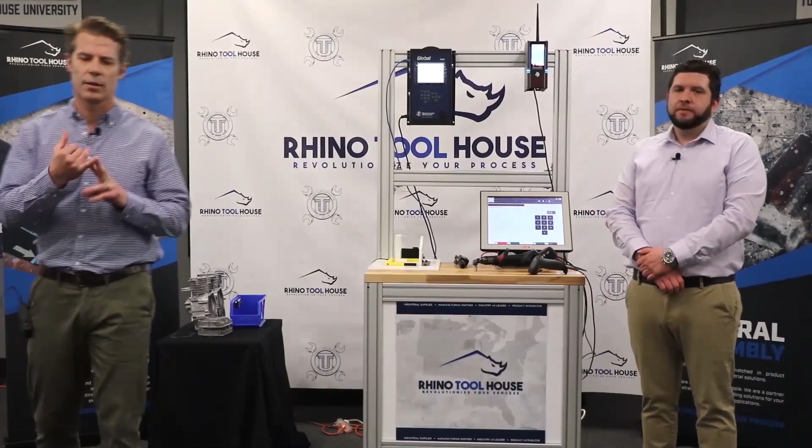We're doing the safer at home thing. All of us here at Rhino Tool House, we are an essential business, so we are open, but we're doing our distancing, and we're at home when we're not here, so a lot of our sales force is at home and interacting with you, our customers, so hopefully you're doing well and you're safe at home, and we'll get through this sooner than later. So one thing that I found that the safer at home's taught me is that I really miss bars, restaurants, and non-essential businesses. So I think we'd all agree that we want these things back open sooner than later.

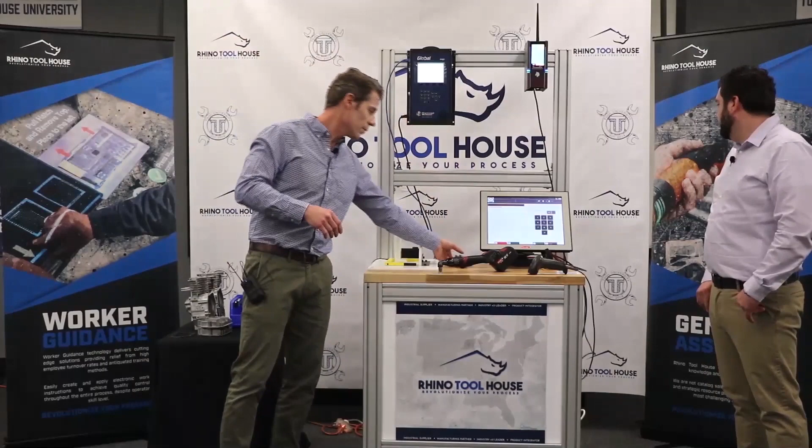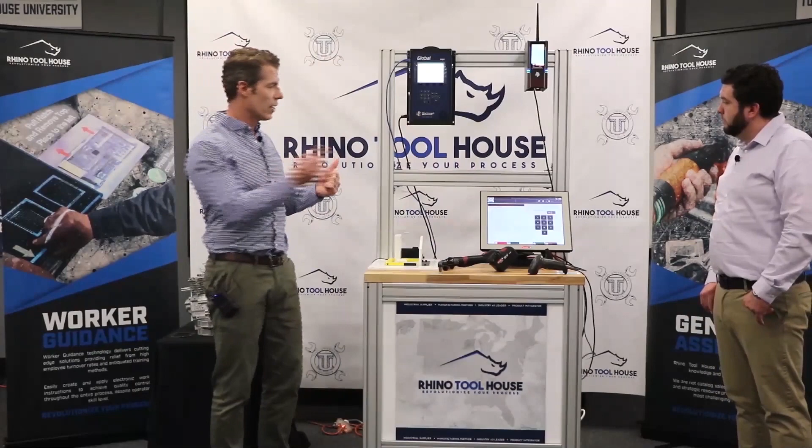This is what's going to drive the behavior of everything that's going on. And then we can also put in other devices. So we've got a Sturtevant Richmond Global 400, up to 16 different tools. We've got a click wrench here, FM click wrench that's going to send a signal back. But we could also do digital torque wrenches. We could do battery torque tools. And we could all make this one big happy family that would take the operator through it.

So I think I covered everything for the intro. I'm going to turn it over to Stefan, and he's going to talk more about this, and enjoy the show.

Hello. So like he had said, we're talking about Pivotware today. Pivot, PVT, it's for process, visualization, and traceability. And then ware for hardware and software. So when we talk about process control, we like to talk about the importance of process control. So you want to have a consistent product every single time out the door. You also want to be able to eliminate time for different types of training, and you want to be able to increase productivity. So with this, we have a no faults forward system, which allows any product being made to interlock into any type of device that you would like.

And from there, if a mistake is made, we're able to catch it immediately instead of waiting for it to go from station to station down the line, because the farther down the line it goes, the more cost it takes to actually repair said problem. So being able to catch something on the fly and rectify it right there is a great benefit.

So Infinity itself, or sorry, Pivotware, kind of think of that like Microsoft Office. So that's the whole product brand. And then it comes in 3 different options. So right here, we have an Infinity station, which you can get with the panel PC here, or just the software platform alone.

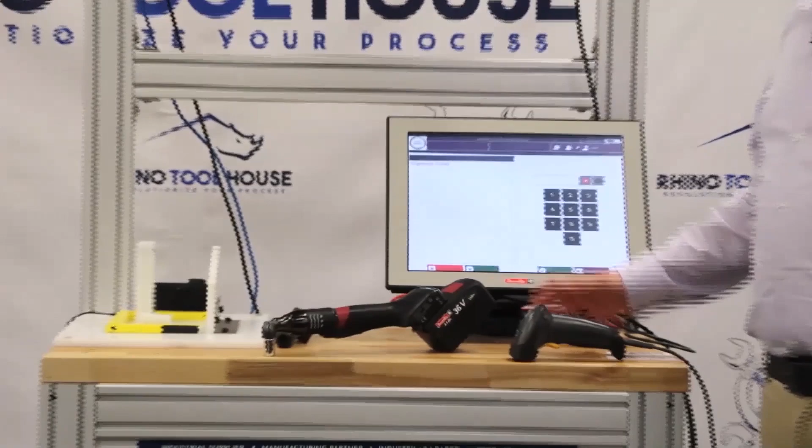There's the configuration software called Fusion, which is very easy to use to the point where you do not have to be a controls engineer to interlock all of your different types of devices here, whether it be your I/O devices, your pick lights, your tools, any sort of cameras, scanners, anything along those lines. And that's all done inside of Fusion.

And then we have our traceability services. So that allows us to create reports on the server end, as well as talk from station to station to make sure that it was properly done at one station before it goes to the next station, and run local and network-wide reports. So essentially, full birth certificates of the product.

Let's see here. As far as the traceability aspect goes with it, the beauty of it is being able to know who, what, when, where, and how. And so with being able to have all that information, if a product ever leaves and it comes back, you're able to scan that particular serial number, and you'll be able to trace down every individual bolt to who did it, when they did it, etc.

So I'll go over what we have here itself. So we have our station. I've got our 2 tools. I've got a part sensor here. I have a button to advance the process. I've got a pick bin right here, pick light. Make sure that we pick the proper bolts and some of our parts. So probably be easiest to just run through the demo right here.

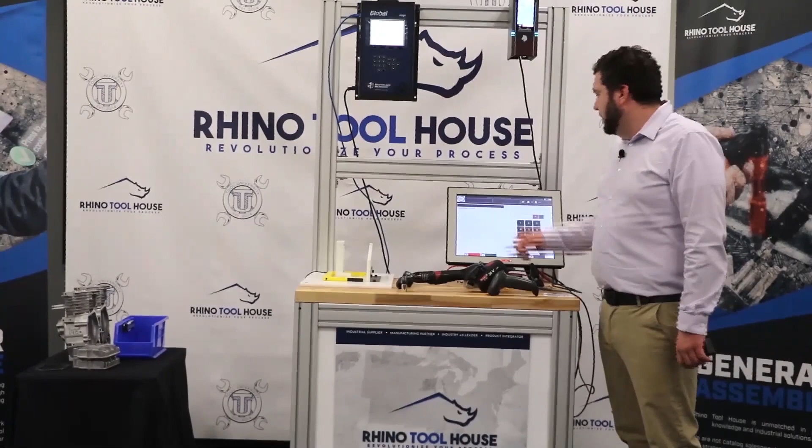The very first thing that the station tells me to do is to log in. So we want to know who we are. I have operator and supervisor on here. Usually you would put each individual person's name. You can mass import your entire list of operators and everything, so it's very quick and easy to do. So I log in as the operator, and I'm ready to begin my process.

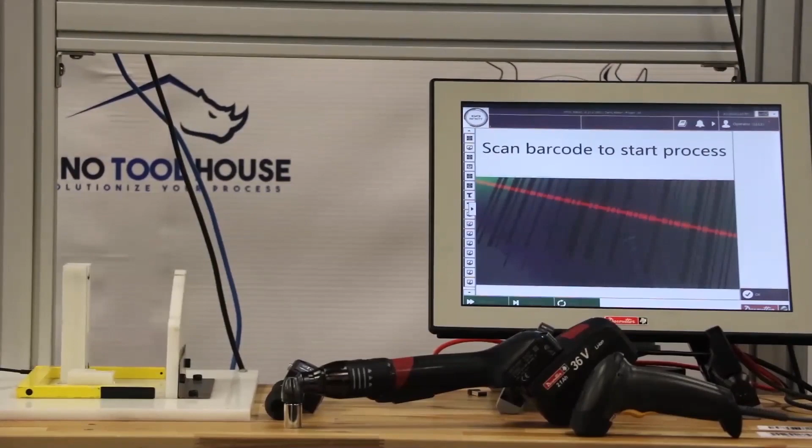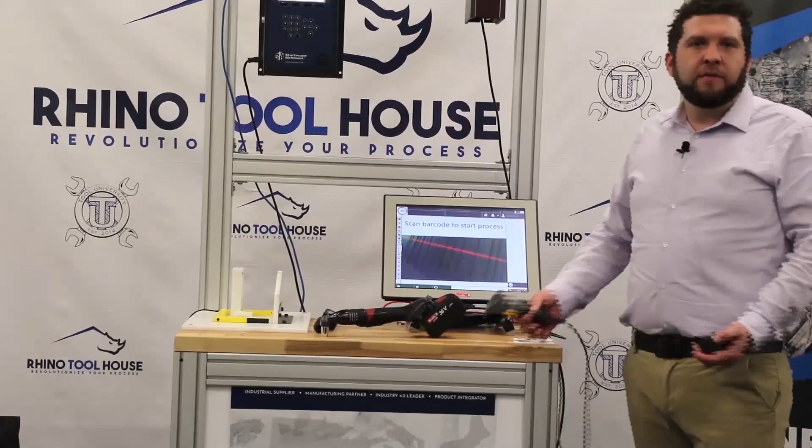So it says scan the barcode to start the process. So I'll pick this up. I would scan the part, any sort of traveler. This also could be sent down from a higher level system, and that way we know what it is. So it could come into station, and after the first station, you might not even need to scan it, depending on how your line is set up. But this particular one, I'm going to scan it.

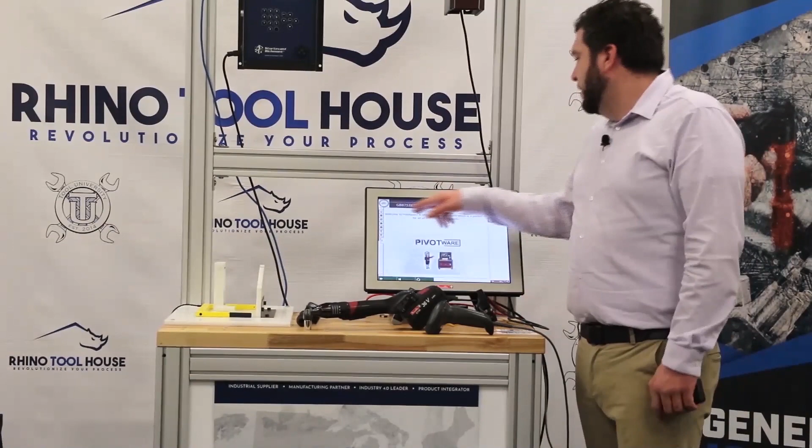And now what I just scanned up here, this is our model number. I'd place that up here. If I wanted to add in a unique serial number, that would go right here. I'm actually able to filter our builds based off of what I'm scanning here. So it just says, welcome to Pivotware, a process control platform.

So I'm gonna hit OK. So you can hit OK on the screen. But I also have a button to do that as well so that we don't have to walk back over to the screen every single time. So instead, eliminating those non-value added activities. So right here, it says place the part into the fixture.

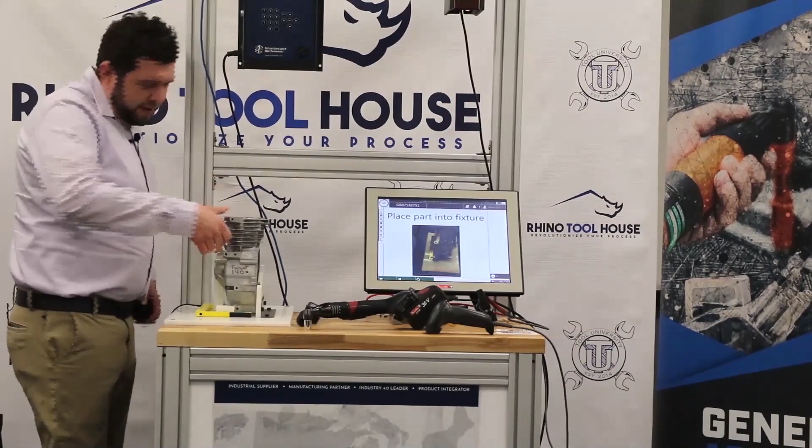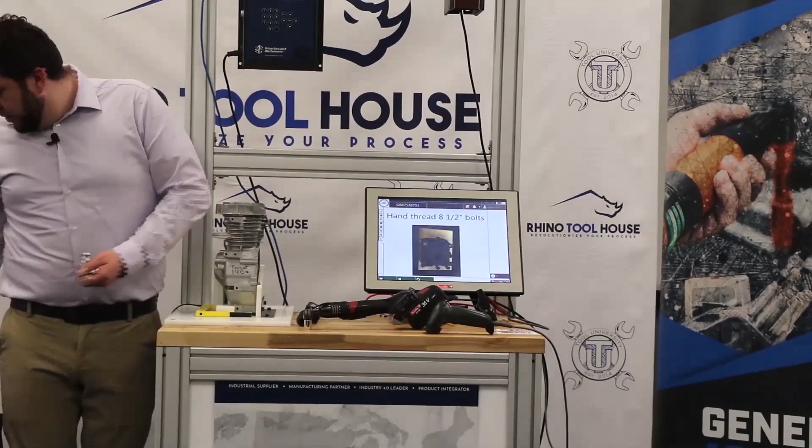So now, as we put the head on, it wants me to grab the bolts and tighten those. So this right here is where we could have it recognize that I went into the bin and actually picked the bolts themselves. It wants me to hand tighten those.

So as I'm doing this, sometimes we might have some sort of vision inspection system recognizing that the gasket was placed on correctly in the right orientation, that the head is properly aligned on there, that I'm putting the bolts in the proper sequence. You can also use, when we get to the torquing aspect, positioning systems for that as well. So we could use it for a standard position encoder-based torque arm, or we can do it with one of the multiple wireless opportunities for tracing the tool, tip of the tool here.

So I've done that. I'm going to advance, and at this point, prior to this, the tool was not active. I could not run this tool. It was completely shut down. But now it's going to tell me bolt for bolt where to go on here, and the tool is active now. So the hotspots on here are just a reference, unless we are tying in some sort of positioning system.

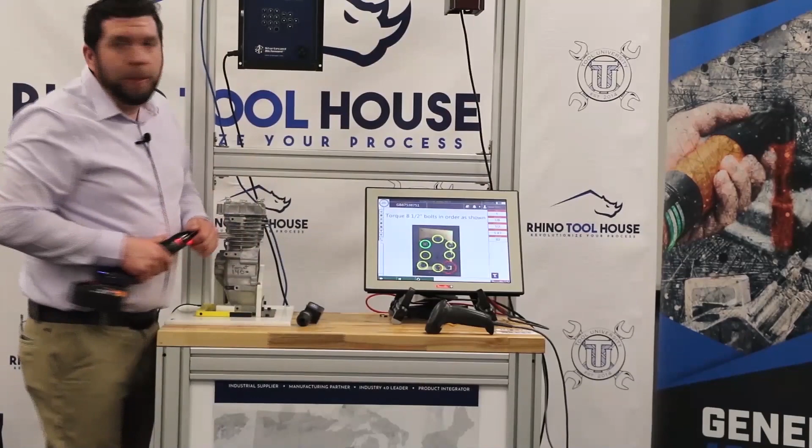So I timed out there. And when we get an error, so I'm going to try to force a bad here. There we go. So I have allowed myself 2 opportunities to get this bolt right. So I could back it out and try it again. But if I happen to get an error again, now it completely locks out. The tool is no longer functional.

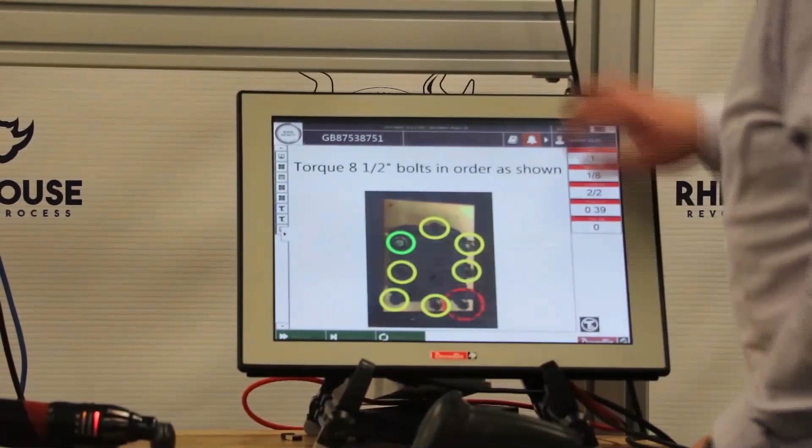So what I'd have to do here, because I'm just the operator, I would have to log in as a supervisor. And this is a feature on here. We could actually call a supervisor from a list of options on here that we could tie into I/O as well. You see the flashing bell that can go into a stack light or anything along those lines. However you want to do it, maybe a little buzzer tied into an add-on system somehow.

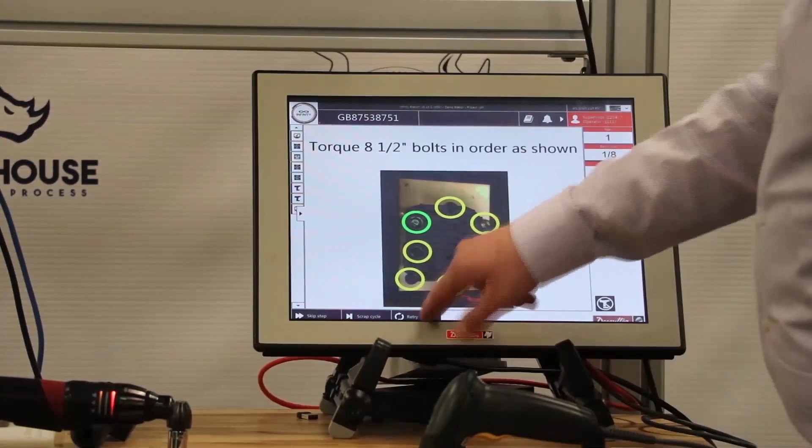So as a supervisor comes over, he logs in, and now you'll see both the operator and the supervisor are logged in. So we'll know that they're both logged in during this error as it occurred. You also notice that these options down here for skipping a step, scrapping the cycle, or retrying the bolt itself, now I actually have access to them. So I hit retry, it enabled the tool again, and I'm able to run this bolt on. All right, now I got my good.

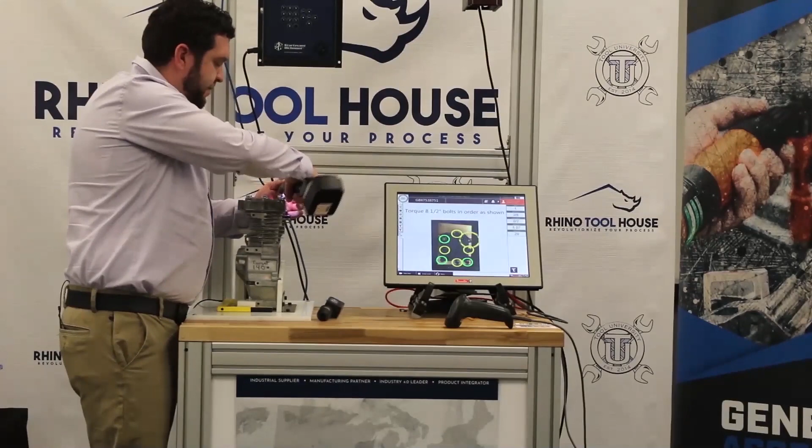I could watch him run a few more. And I could also log out at this point as well. As everything started to go well, you see that they're able to continue to move on here. Say, okay, it seems everything's going smoothly. So as a supervisor, you'd come and you would log off and let them continue on with their job without missing a step. I can continue on here, doing the cross bolt pattern here.

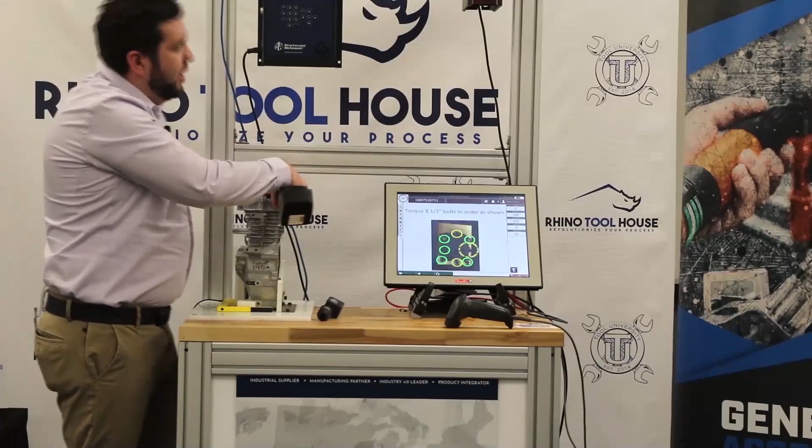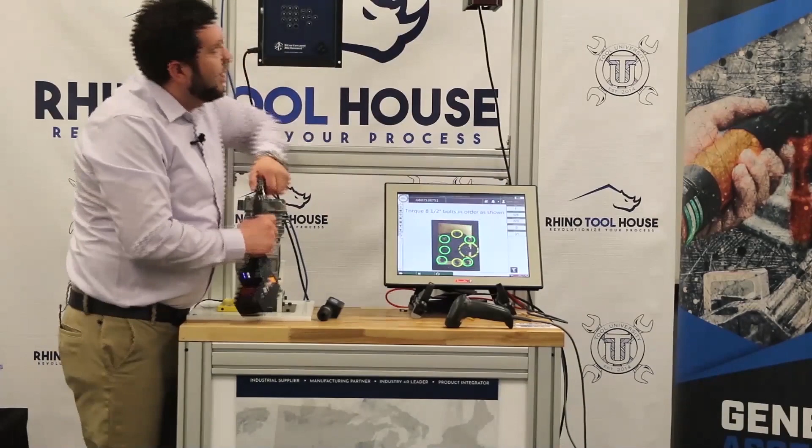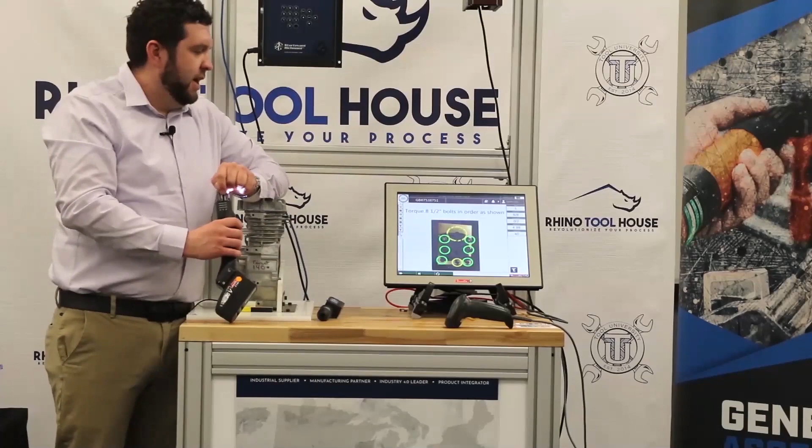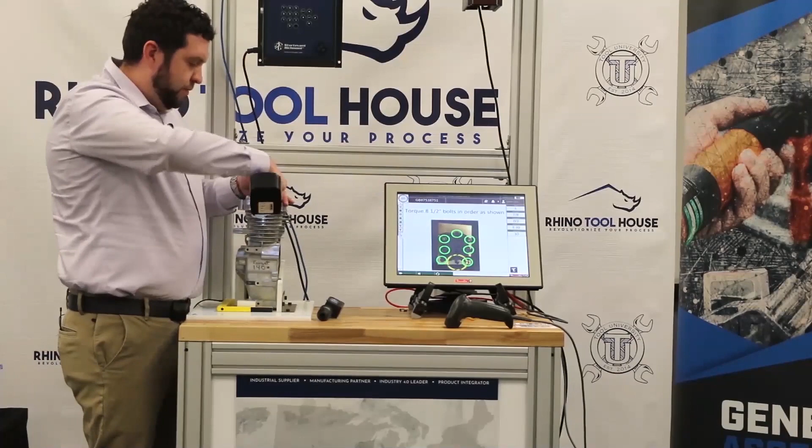Let's see here. And if you had any sort of issues with the bolts, with our andon call here, we could also do that as our option. Oh, got a bad and a good. Now every time we get any sort of torque result, it's going to be recorded. So all of the bads are going to be recorded, as well as all of the goods. So you'll notice in the report, I'll show you the report when this is done, and we'll be able to see that we had a failure here, a failure there, and we just continued on. So I completed all the bolts on there.

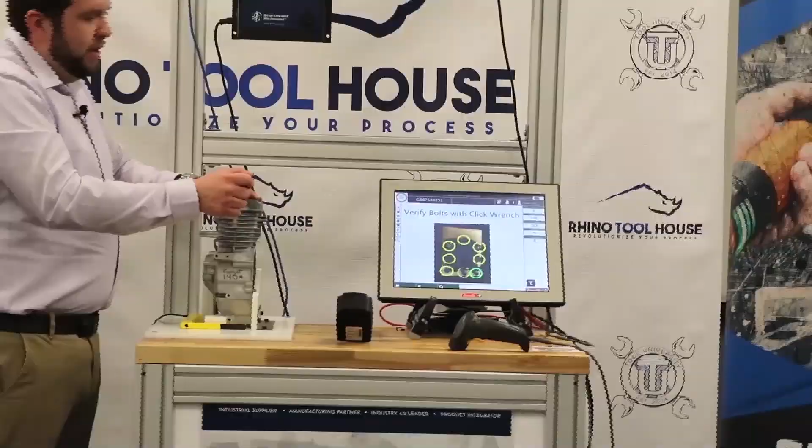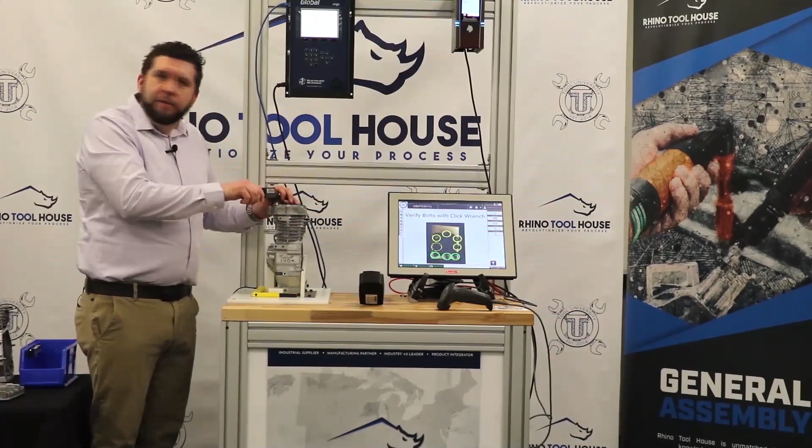Now it wants me to verify the bolts with the click wrench. Like Chip had said, this is an RF click wrench with the limit switch inside of it. So as we go through to torque each one of these bolts, we get a good and a bad. So you can also error proof with the click wrench. So if I were to over torque this, let's see, we got a bad there. So I allowed 3 retries with the click, but usually you'd probably want to back that out a little bit and try to click it again. So as we fly through, make sure everything's good.

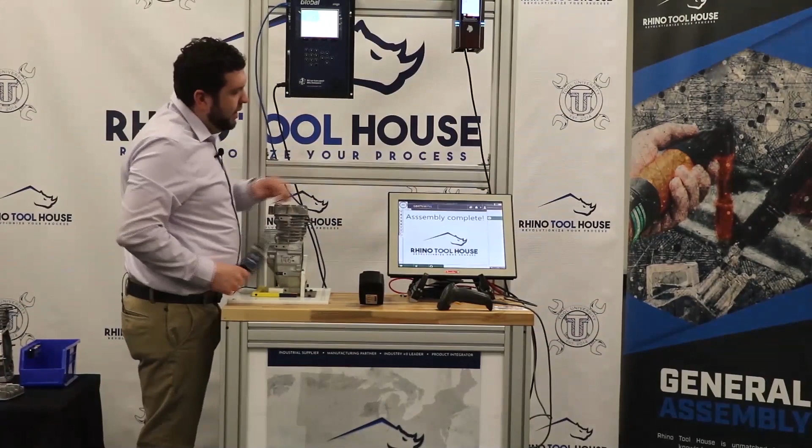There. Now the assembly is completed. The step is on a timer here, or we could actually just hit the button to advance it to start back over. At this point, you're able to scan a new product. A new one would come into station.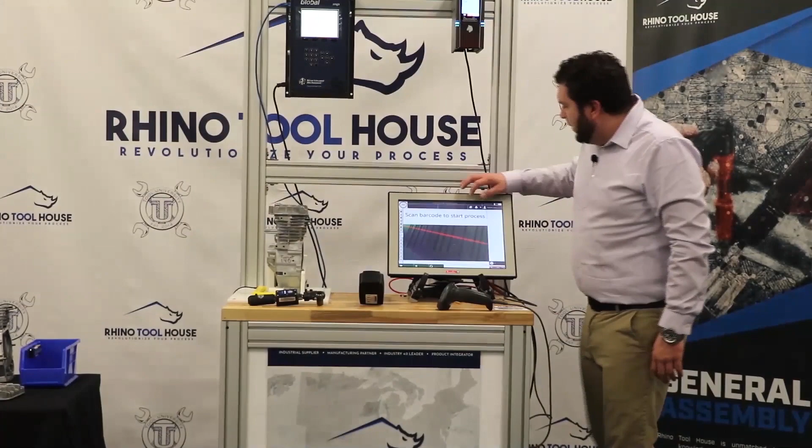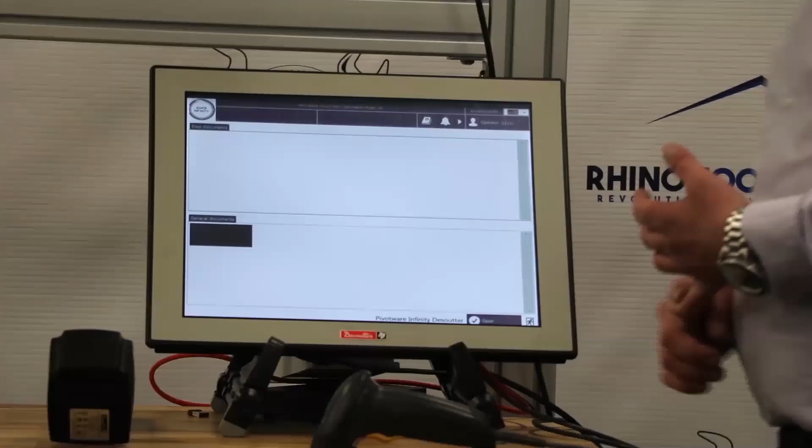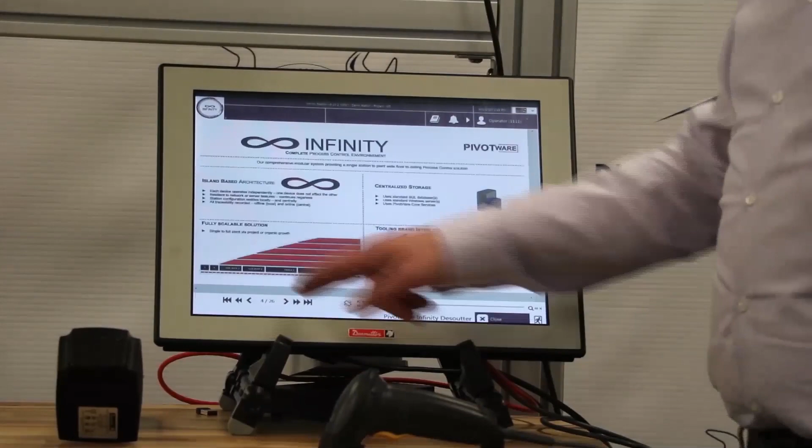Now, on the screen itself, we're able to add in additional PDF documents or step documents. So any sort of control document you might want, maybe emergency evacuation procedures, PPE kind of stuff, company information. I've seen that put in here, as well as just general information. So you can open it up, and it's a little viewer here. So you're just able to scroll through, put any sort of information you want in there. Able to add videos and GIFs.

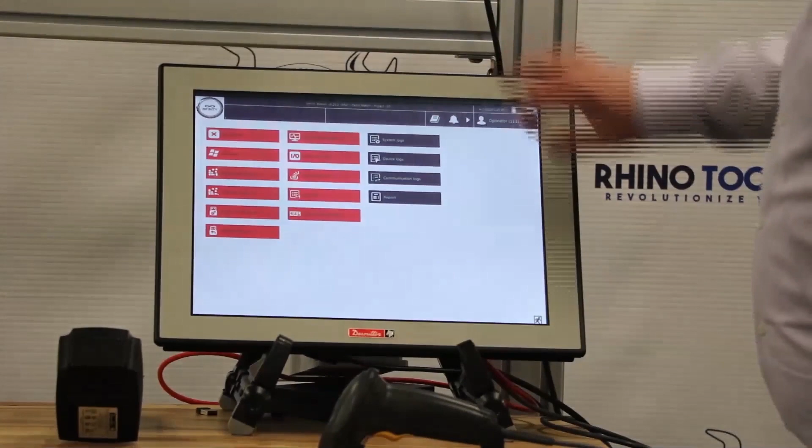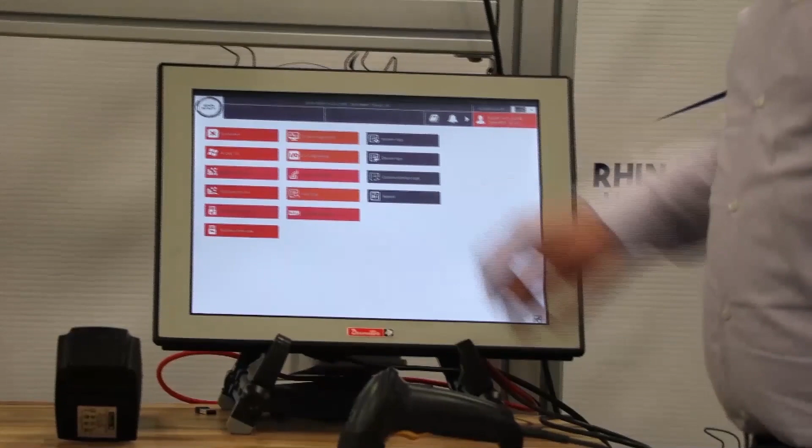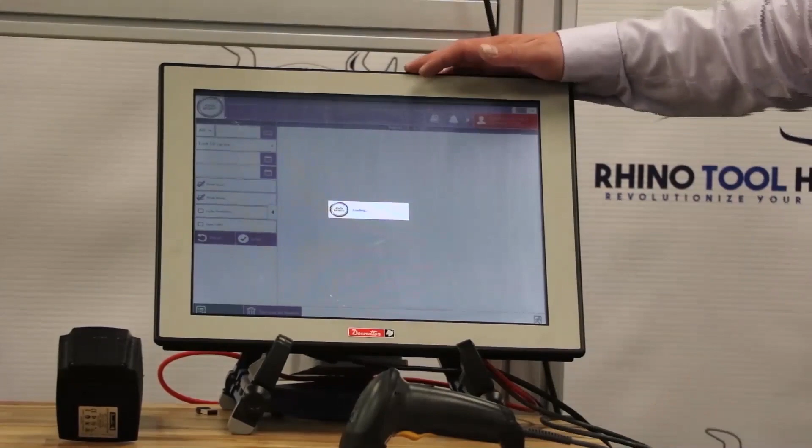Now I'll log back in as a supervisor, and we'll take a look at the report. So right here, we can hit a report. This is a very similar report that we would have if you were running it from your computer, if everything was networked. So this would just be one individual standalone station. However, you can just keep on building upon them. So you can do sub-assemblies, you can do the full assembly line, you can go line by line, it doesn't really matter, but you can start with just a single station here.

So here's the last 10 that I had on here. So if I were to open it up, you can see that it was passed, completed. You can see the start and end time and the duration of the step. You can actually expand it, and you're able to see all the information here. My actual torque values as well. So you see my failures. All the individual information's all right inside of here. Now you're able to export.

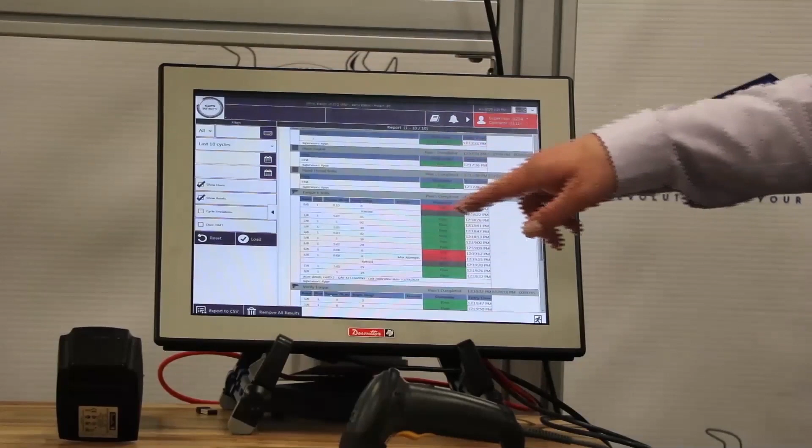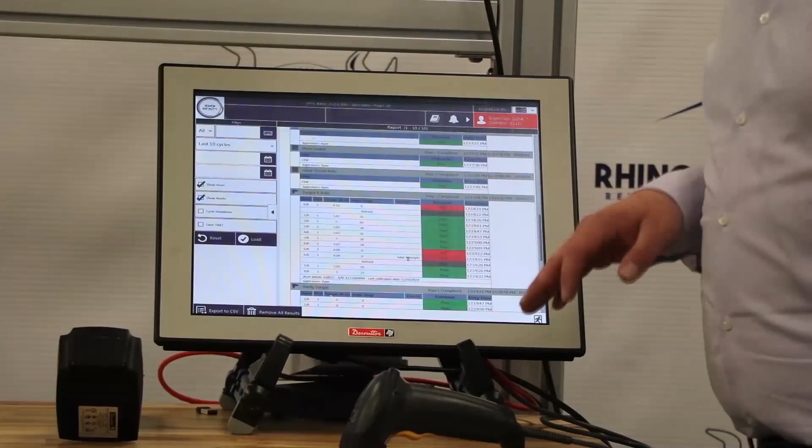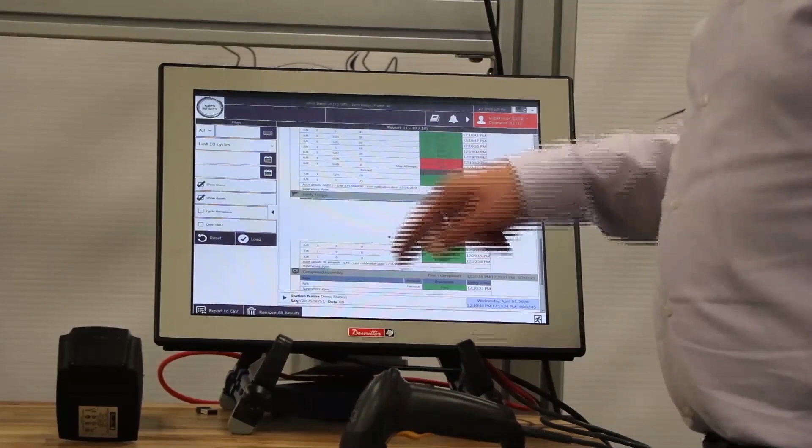So we'll have our torque and angle, whether or not it was retried, whether or not we had to hit the max attempts. So if I just got one, since I allowed for 2 bads before it moved on, then it would just be a retry. But since I had hit 2, it says max attempts, and that meant it had to be unlocked. So that's still somewhat flagged in the report to know that there was an error in the process. However, it was rectified. You can take all of these and you can export it to a CSV with a flash drive. You can save all of your information however you'd like on it. So it's a quick way to grab a report.

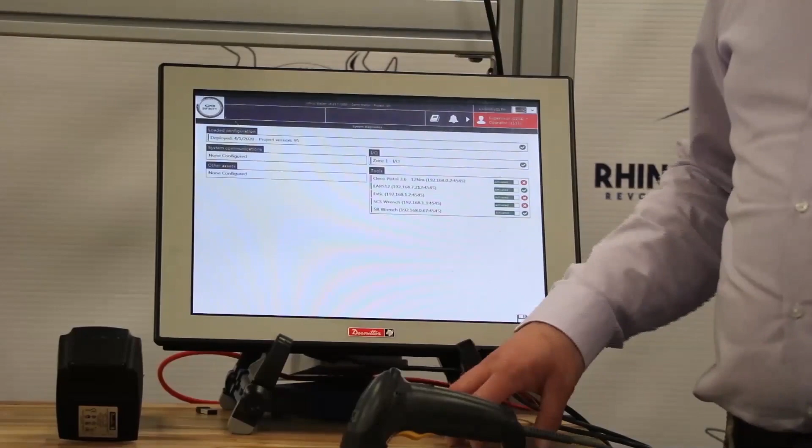We also have on here our system diagnostics, so you're able to see all of your different types of devices that are connected at a glance, and you can see whether or not they are active. So I had taken a few tools off of here that are not part of this particular assembly. You can check your device logs, your communication logs, everything. So troubleshooting's right on the screen itself as well.

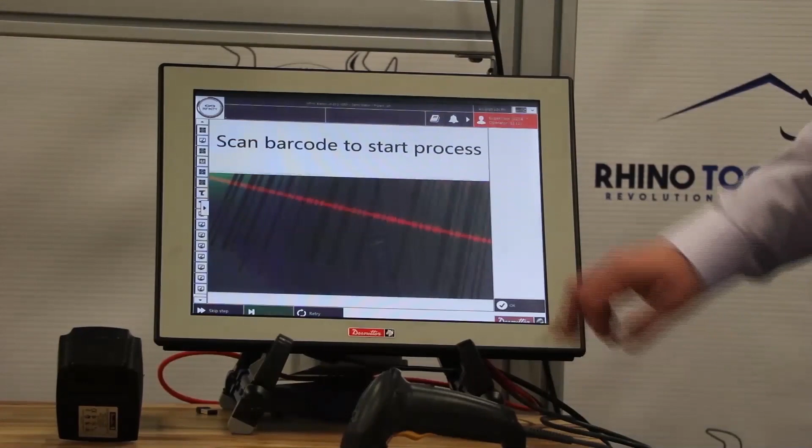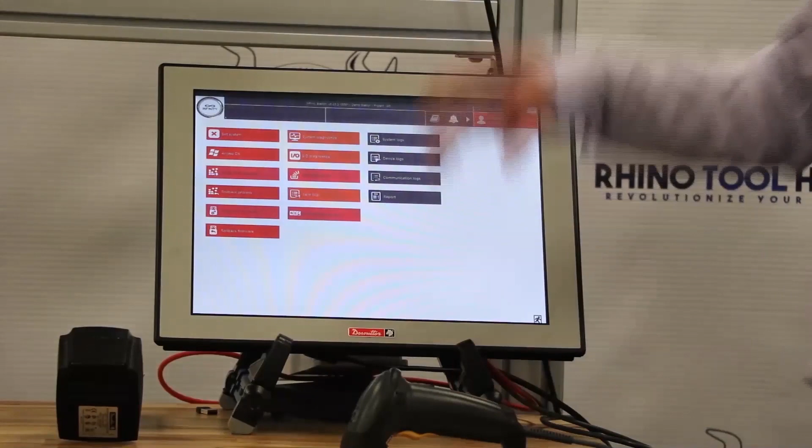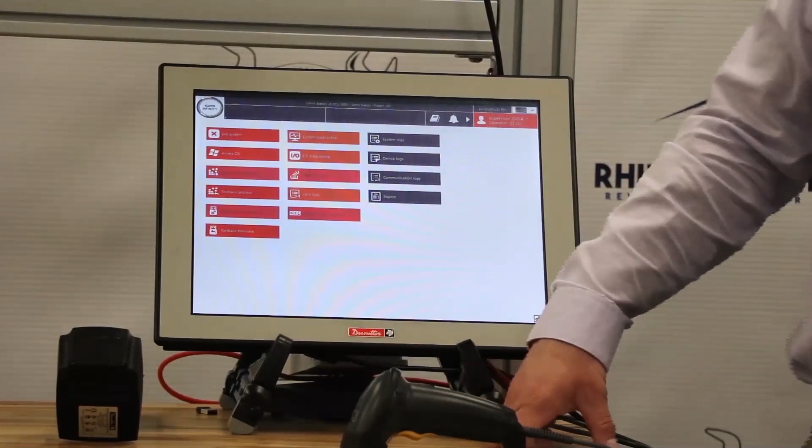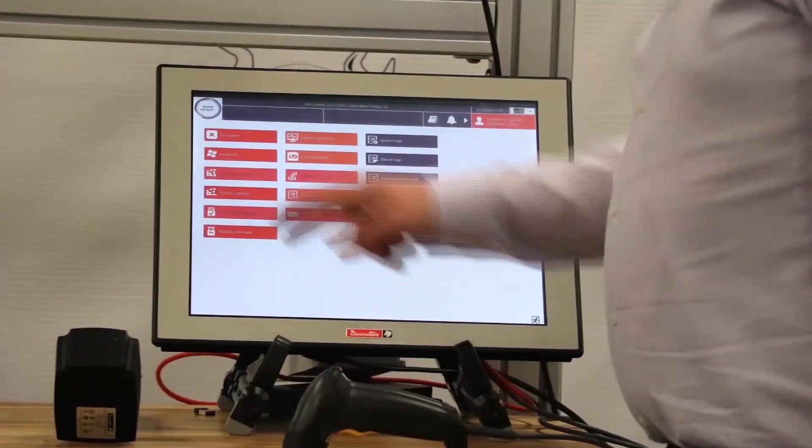Another very cool feature of it is the whole assembly build in the process is stored locally on here. So this is not connected to the network. It's a direct connection between these devices, just Ethernet cable. But if the network goes down, it has all the information necessary to build without having to rely on the higher level system. Let's see here. Oh, yeah, that's about it in an overview.

Any questions? Can you hear me? Am I back on? Yeah.

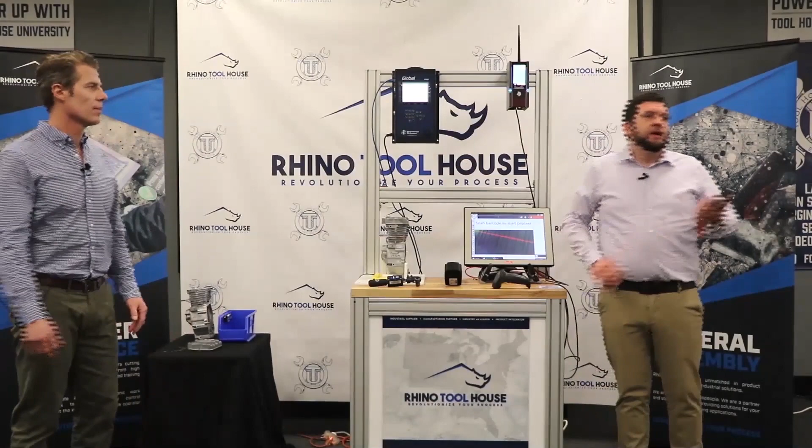Is the button to advance the process a Desoutter option or something custom? It's something custom. The button to advance the process is not a Desoutter option. It's separate, but we can supply these for it. There's no battery in it. It uses the kinetic click to a receiver, and it translates it into a USB keyboard wedge.

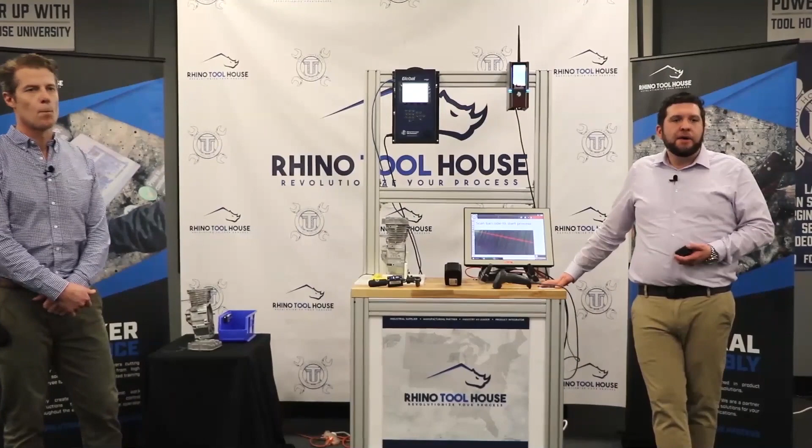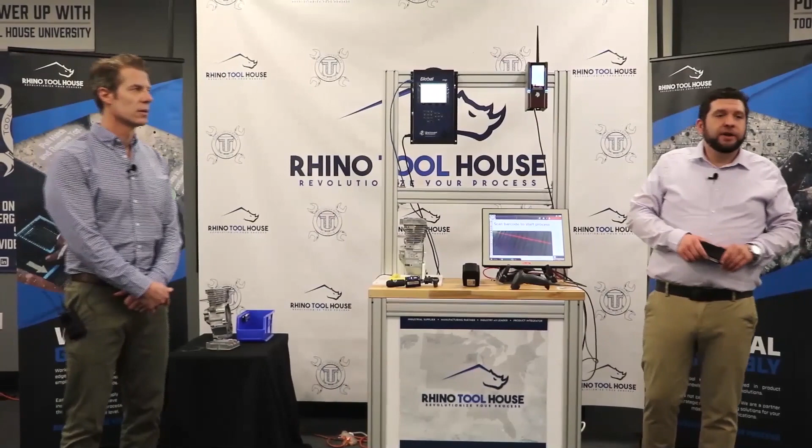Are there any advantages to utilizing Desoutter tools with Pivotware versus non-Desoutter tools? At the moment, no. Pivotware is brand agnostic as far as communications to tools. I'm sure you'll be able to get more graphical type of things with trace data down the road, but at the moment, they're all the same. They're not going to take away functionality from different brands of tools for this to work properly. Yeah, I think there are some accessories that would be an advantage. Smart arms, things like that. But it will talk to any brand, and that's Sturtevant's non-Desoutter type product. Other brands of torque tools that it will work with. Talks open protocol.

Can you incorporate a training video with Pivotware tied to the model number? I guess I'm not quite sure. Could you do a training video for customers or for employees? Oh, to add on to here. Yes, you can. You can add a video. Yeah, it's kind of like a first step, or you put them in front of the Pivotware to train them, and then they go out on the floor. Yeah. So that step could be filtered. So you'd scan that in, day one, and it shows you how to build. And then after that, you wouldn't have to watch that video every time.

Is there other capabilities to transfer data other than CSV? Yes, you can run a report. You could do a PDF.

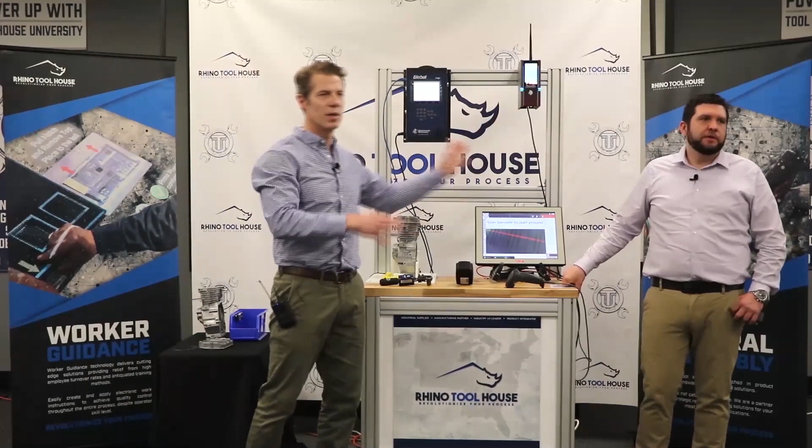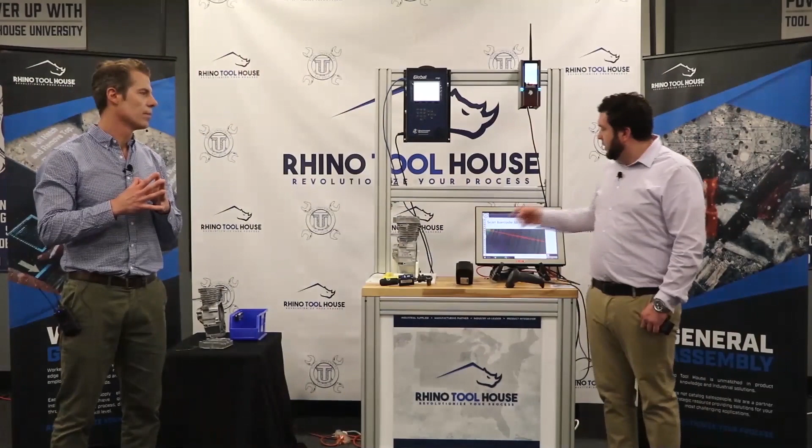Yes, it can. These could actually just sit in a server room if you wanted. They don't even need to be on the factory floor because everything would be wireless. And because we're using different port numbers for communications to these, they're all running on separate channels. So you could have each individual tool on a different station all across the assembly line off of a single Connect box.

Yeah, and there's a product called Site, I believe. Well, I guess if you had Pivotware, you'd have an HMI, but if you didn't, you could even have a Site, which would give you torque results.

Can you create the work instructions offline and then upload them to the workstation? Yes, yes, you can do that. That's its main design. You would create everything offline, and then you can either push it over the network to it, or you could add it in with a flash drive.

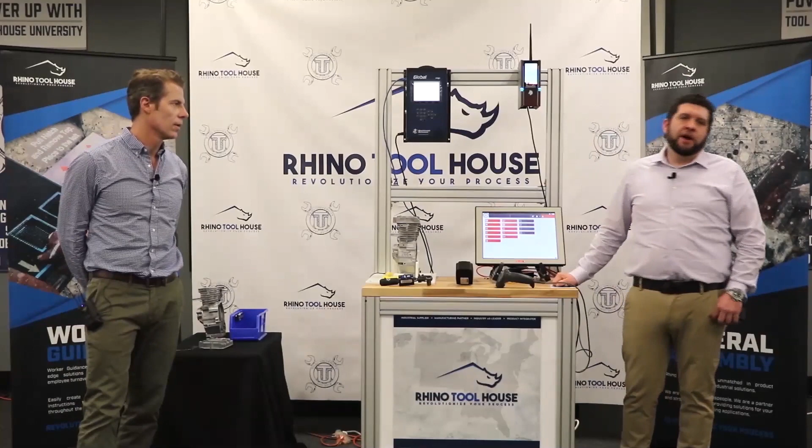If you came over here and you plugged in a flash drive on the back and it had your new process files on it, you just hit a button and it would load it all up. You're good to go. If you didn't like how something turned out, you can hit the rollback process and it will bring it back to where it was before you did that.

Can we talk more about the SQL database and how results are pushed to it? Okay. Sure. On the server, there's a database side, and you just run a script to create your tables, and then there's a service or application. Sometimes they're on separate servers. Sometimes you have an application server and a database server.

Sometimes they're together. What happens is all the information from here stores onto a local folder, and then the service, if it has a live communication connection to it, will pull it in real time. If communication drops, then the service goes out and talks to each individual station and makes sure that it has the most up-to-date data.

So all the data on here is stored onto a local folder, and that folder gets emptied by the service. And that service is a single communication to the SQL database. So the SQL database will hold both your process builds and everything that you configure inside of the Fusion software, as well as all of your collected data.